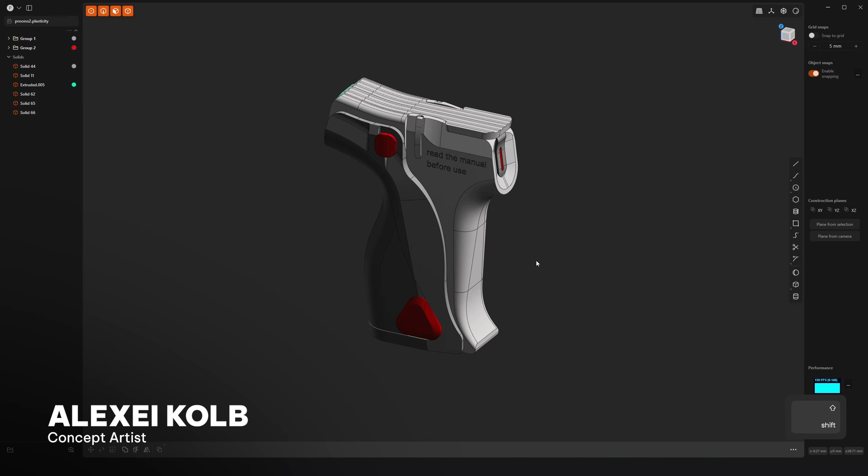In this video, we will be modeling a sci-fi grip. It's going to include a lot of new tools for you to learn. While it is an example I've specifically designed and modeled for the tutorial, the modeling process is close to my real workflow, so you could learn not only the tools on their own, but also the overall strategy for creating a model.

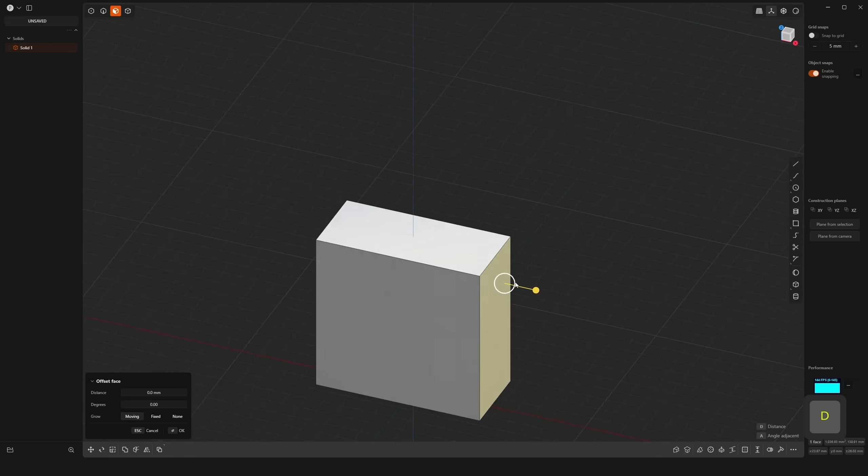The way I would usually start is by scaling the cube to get the right proportions for our model. But let's imagine we need something a bit more precise. Delete the cube. Select the rectangle tool on the right toolbar. Then we're gonna start in the center of our scene. Press C to make it center symmetrical. Before confirming, press Tab to manually enter the dimensions.

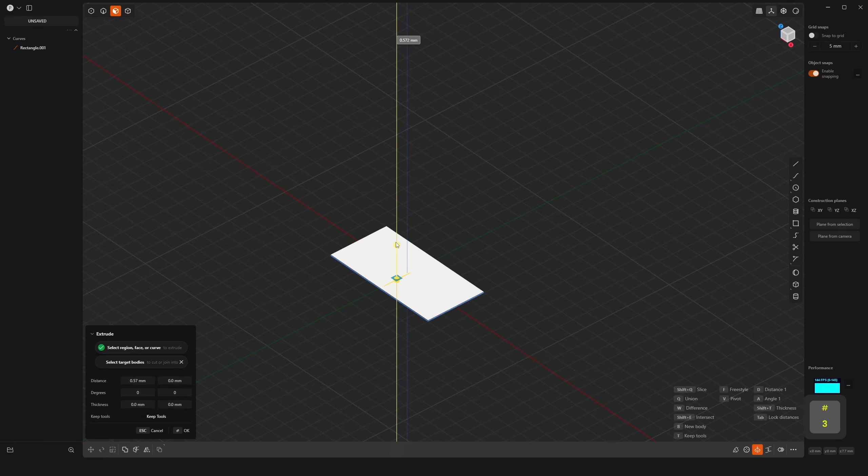Go into the third selection mode for faces. Select the face and then extrude it. You can manually enter the extrusion distance. Let's now select our curve and delete it.

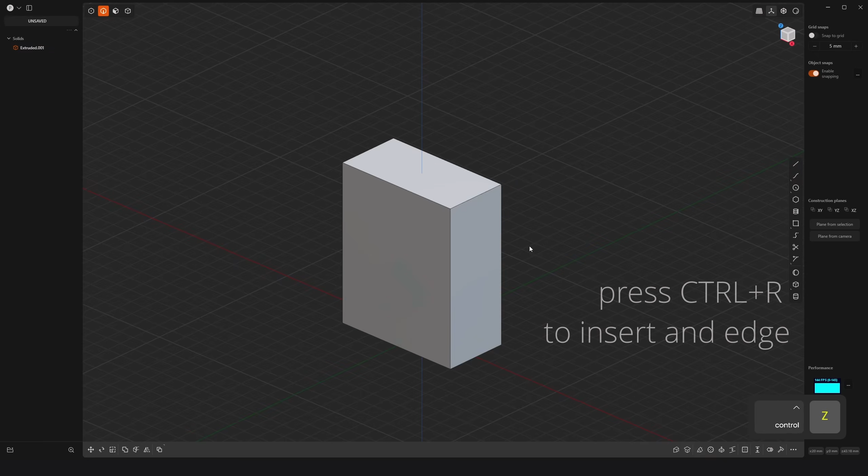Unlike in the previous videos where we used a line to quickly project a cut, right now we are going to use a command called isoparam, or as I call it just by its shortcut, Ctrl-R. It's a very handy tool to create some extra topology. Whenever you start moving or offsetting the faces cut by isoparam, it's gonna create a new geometry based on the initial movement. So if you move it horizontally, it will create a new horizontal face. If moved diagonally, a new diagonal face, or if you rotate it, it's gonna create a new cylindrical face.

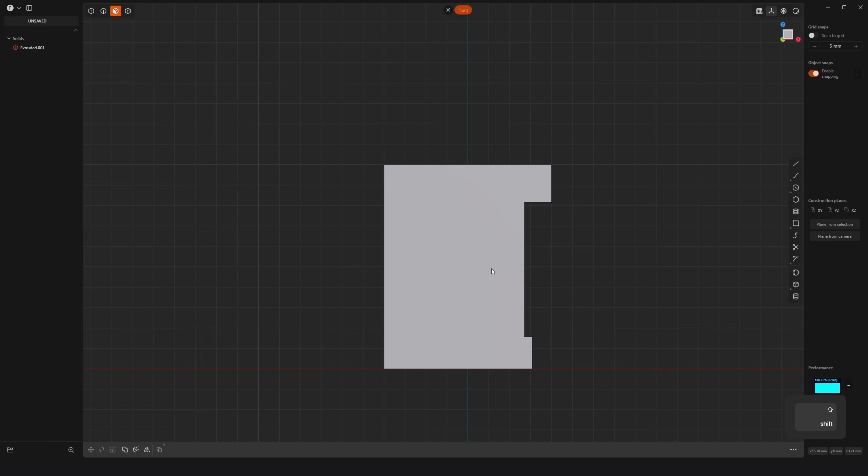Let's use a line tool to create a cutter. After you finish it, press C and select the body. Let's Ctrl-R the top face. If it cuts in the wrong direction, you can press Tab. Press Shift-D to duplicate the face below. Move it up and use Match Face.

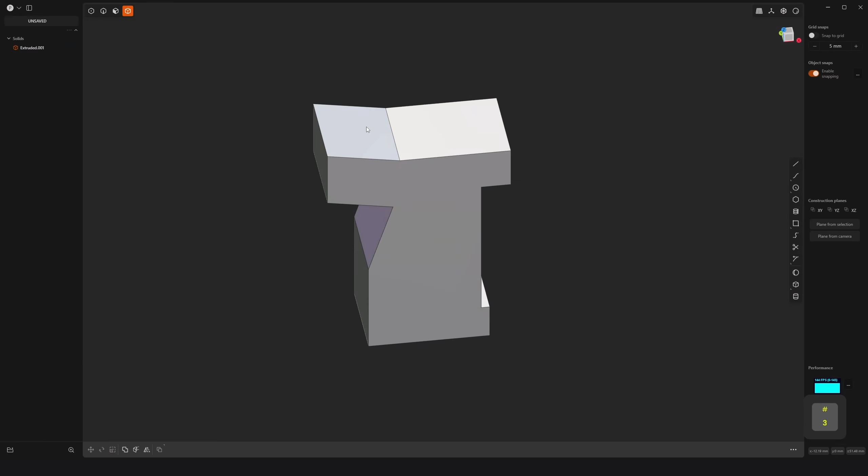While we could have just filleted the back, let's create something a bit more organic. Press Spacebar to set the work plane, and use Spline Curve tool on the right toolbar. As you can see, it goes through points. Press Tab to change it to Control Point. Now adjust the curve so it would look juicy.

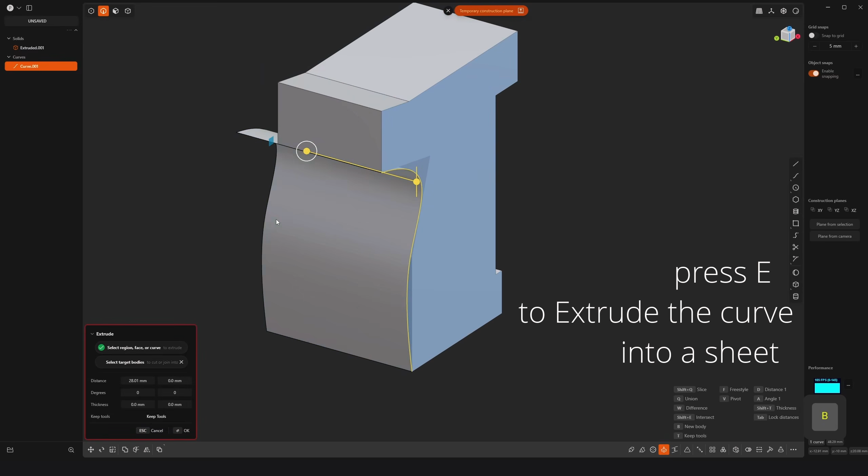One way to make it a part of our body is to extrude the curve sideways, then use Match Face and delete the rest. Or we can just use curve and cut our body by selecting the curve, then pressing C and then selecting the body.

Because we started precisely, we can specify the radius for the fillets to make them touch each other right in the middle. But I don't want that. Let's try G2. Even though it looks alright, let's try something a bit different.

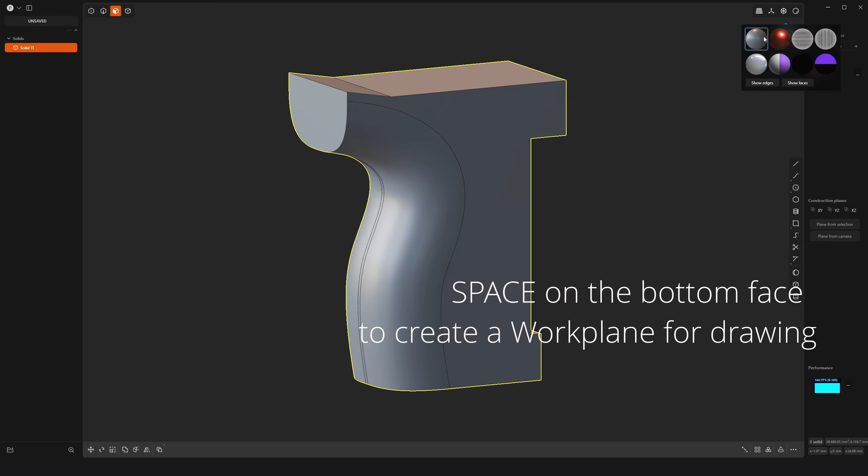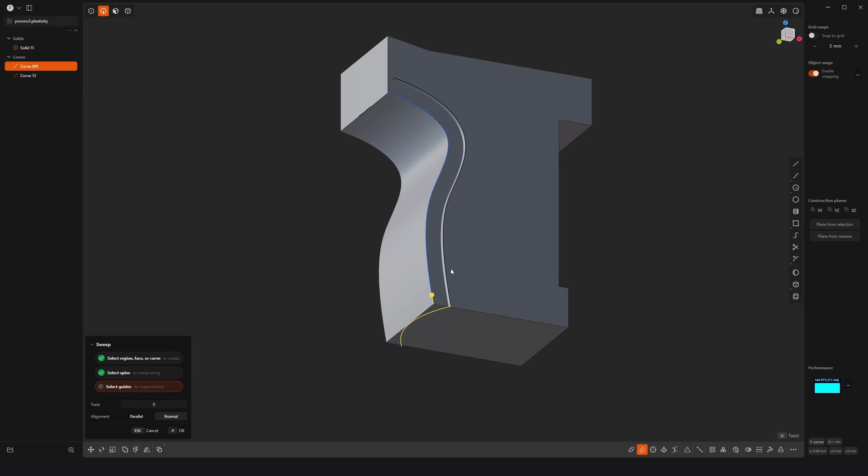Use Spline Curve. You can press Shift to create guidelines. Let's make it bigger to decrease the chance of any problems when using Match Face later. Time to use Sweep. Select the curve first, open F-Search and search for the sweep, or just press Shift-P. Then select the guideline. Right-click to confirm.

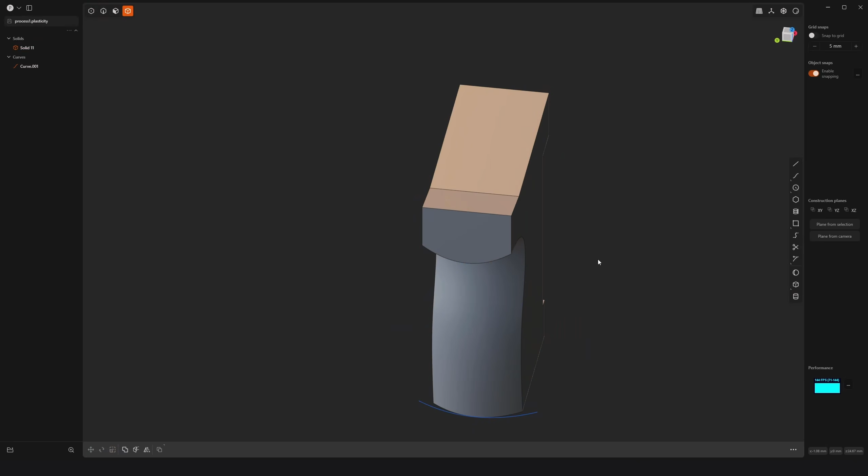Now select the face of our grip, press Match Face and match it to the one we swept. Once we are done, you can delete it. I think it's a bit too thick, no problem, just scale the whole object on one axis. No need for the curve. Delete it.

Time to cut the grip. Alt-align camera with an axis. Shift-A for the line. C and select the body to cut. Let's change the thickness by selecting both sides and offsetting by pressing D.

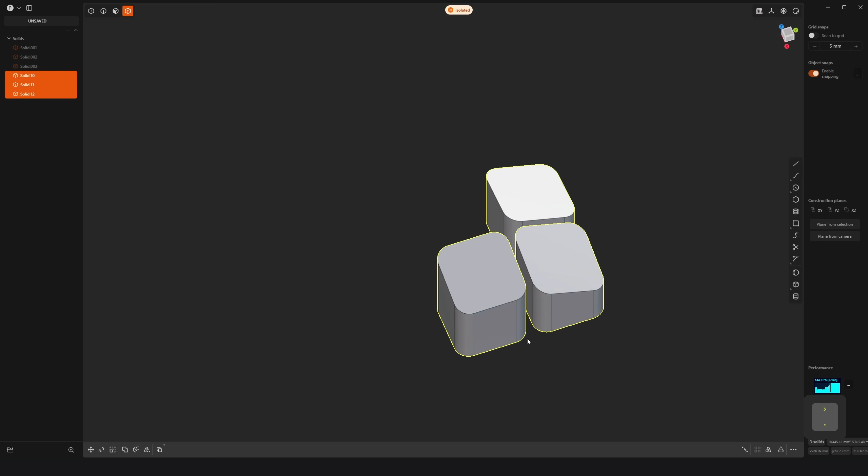Let's quickly learn Isolate. You have 6 objects, you need just 3. Select those and press period key to isolate. Now that we have only 3, what if we need just 1? Select it, press isolate. Let's go back to 3. Deselect everything and press isolate.

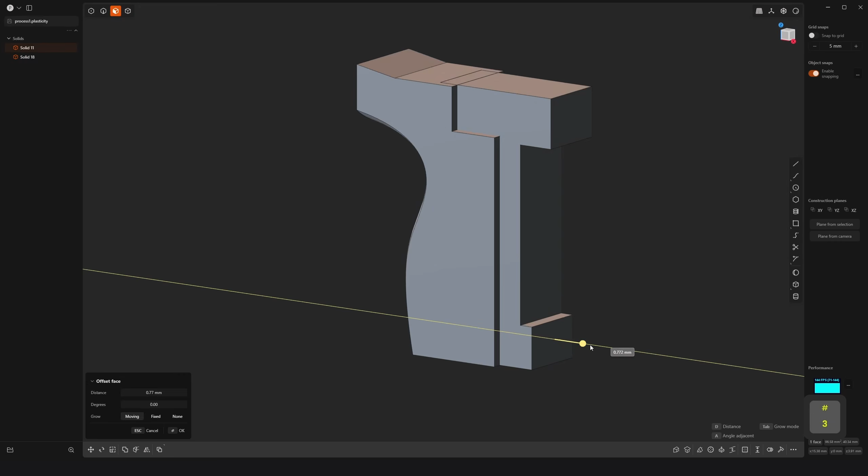Need to hide one object? Select it and press H. Unhide everything? Alt H. Back to 6. Again, have nothing selected and press period key. Yeah, it's kinda like layers. Want to remap it? Search for it in the F-Search and bind a custom shortcut.

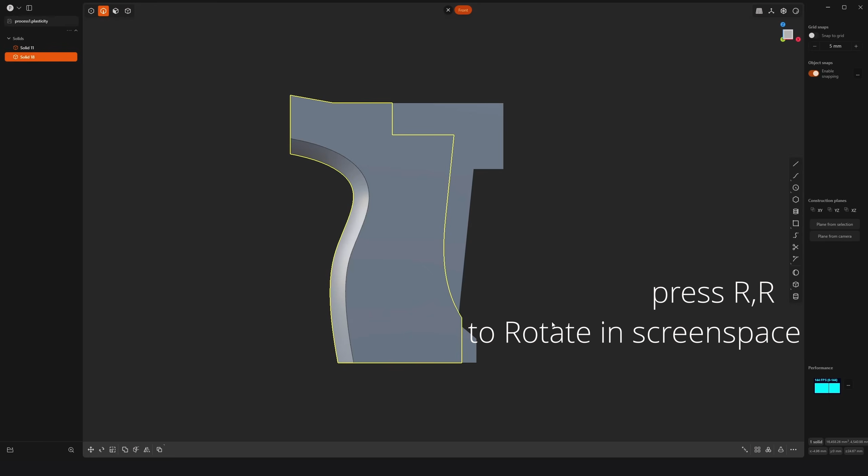Yeah, time to do it again. Don't like it. Let's delete it and redo it. Shift-D the face, move it and use Match Face. Looks decent.

Isolate, Ctrl-R, Offset, Ctrl-R, Match Face, nothing new. Fillet both sides. Adjust it.

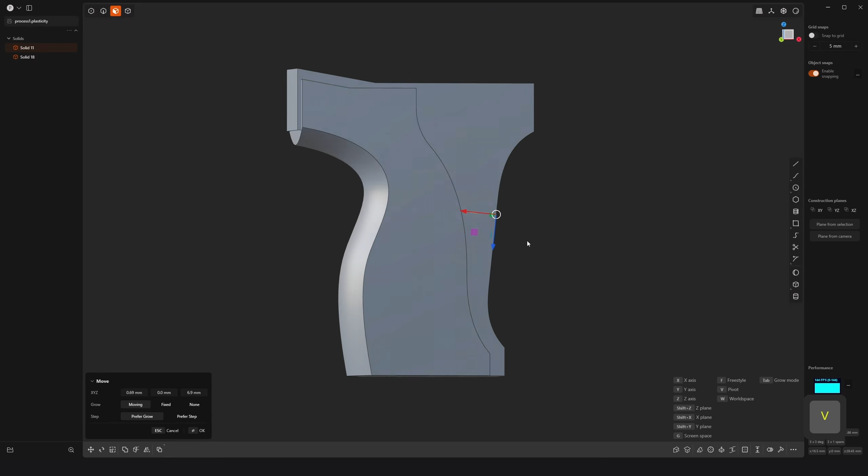Let's fillet the edges here. Not a big fan of how it looks. The bottom needs to be sharper. After you start the fillet, press V to use variable fillet. You can adjust ends right away or add another point for the custom radius. I don't need it, so I'll use the two ends, nothing more.

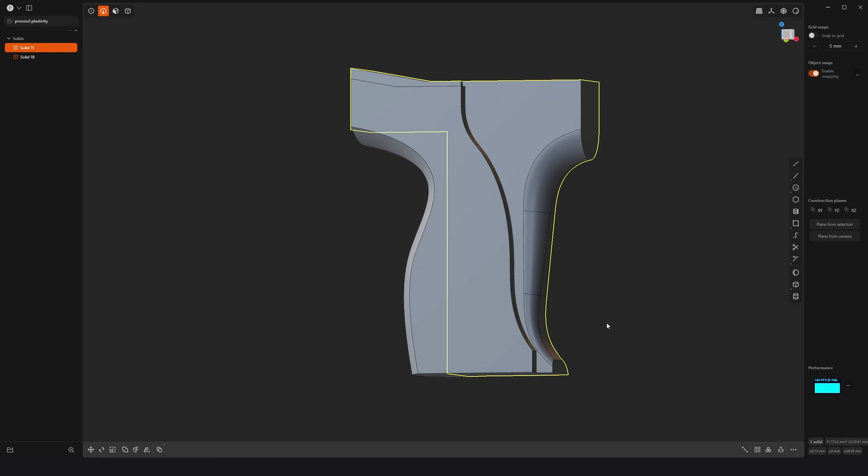Let's mirror. Q to merge. I want to add a plate on top. Select top face, extrude, B for new body. Let's cut the unneeded. Let's cut the right part into two and boolean the left one with the top plate. Looking good. Let's now add some details.

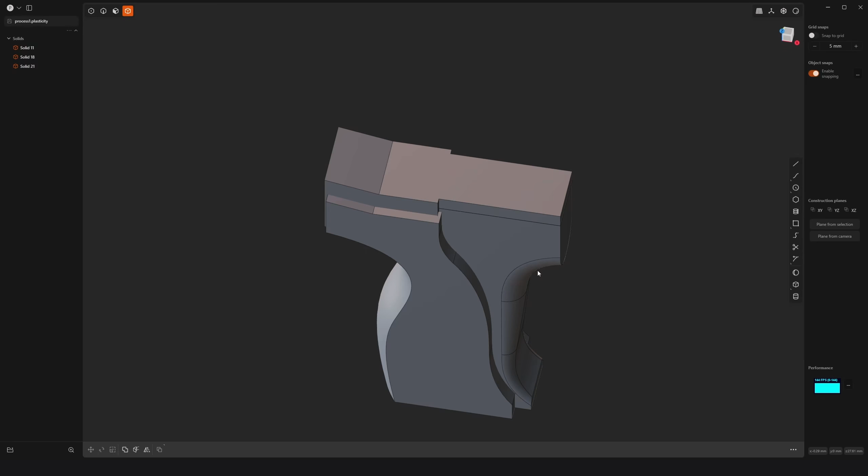I'll Ctrl R the side of the plate, move it inwards, offset the top of the lever up, Ctrl snap it to the top. Now let's boolean the top plate out of the lever. Select lever, select top plate, press Q, then press T to keep tools.

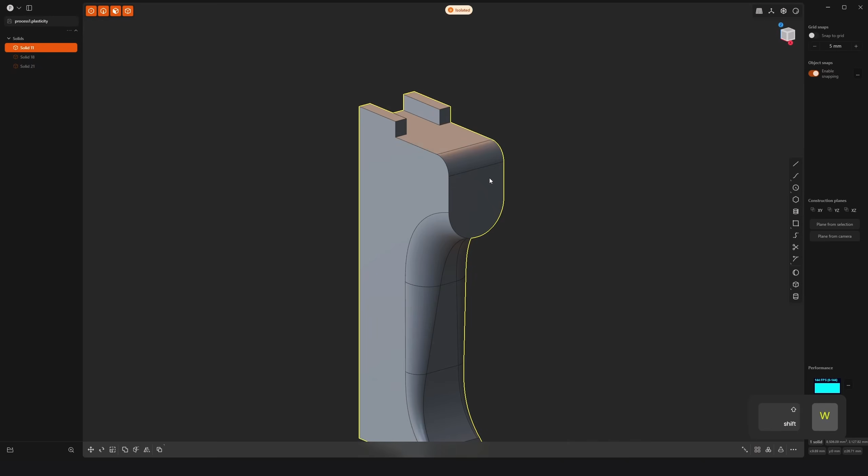Play with it by offsetting and moving faces. Great, let's mirror both. Fillet the sides, fillet the top. Now select the front face and press O for offsetting the edge.

Let's push it in and then push the top face up until it disappears. Now extrude a new body and offset one more, or you could just do a new rectangle. Offsetting sometimes creates problematic edges when you extrude it, so be aware. It's hard to look at without any color difference.

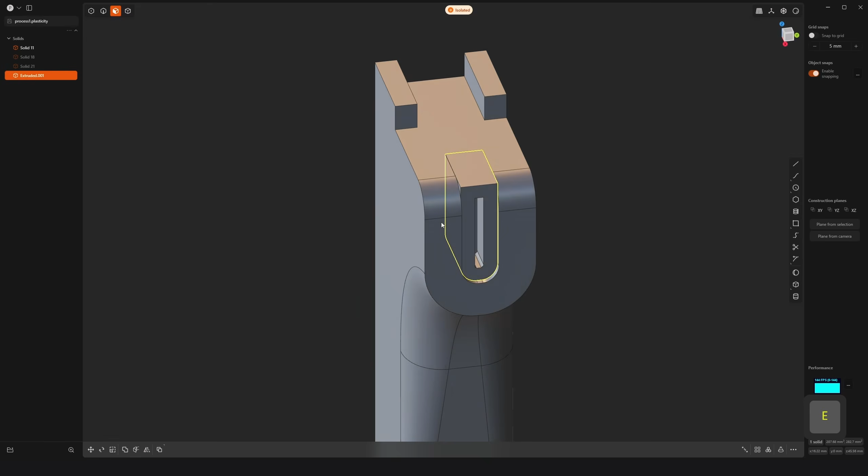Turn on one of the two bottom left matcaps. Let's set a darker color for the grip body. You can also drag and drop it to the objects in the outliner.

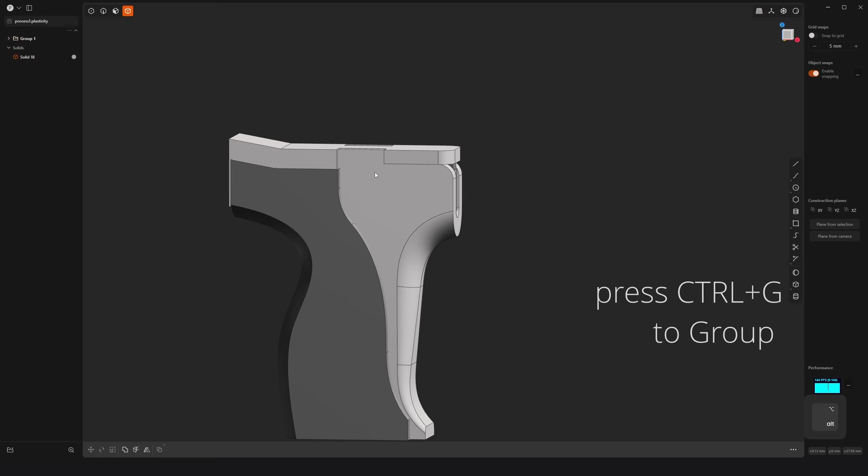Quickly about groups. Let's group everything that's not the main grip by selecting it and pressing Ctrl G. Now, if only the object selection is active, we can select the group by holding Alt and clicking on any object from the group. Also, let's make this thing red.

Okay, time to model a bit more. Let's fillet the back side of the grip. I think G1 looks a bit better.

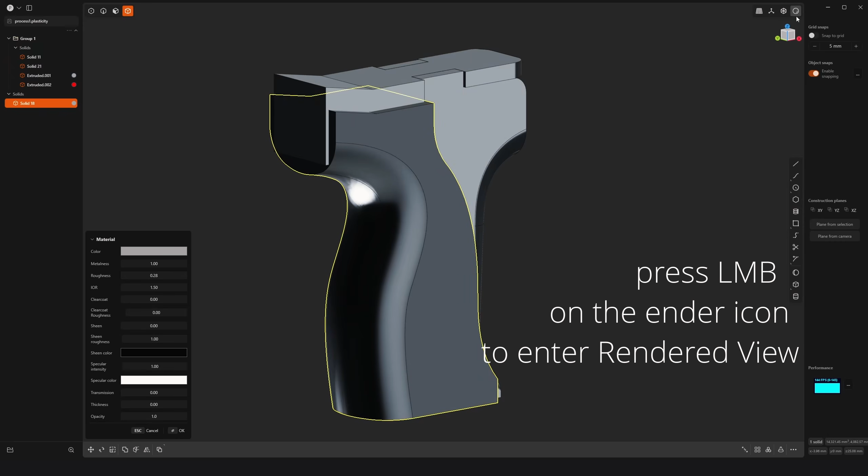Also, a thing to note is everything else other than a color is only visible if you left-click the render icon to activate the render mode. Alt snap the cam to the top, Shift A for a line to cut the thing.

Let's adjust the face now to make it look more dynamic. Looks good, but we can go further. Duplicate the edge. Ctrl R on the cut closer to the edge.

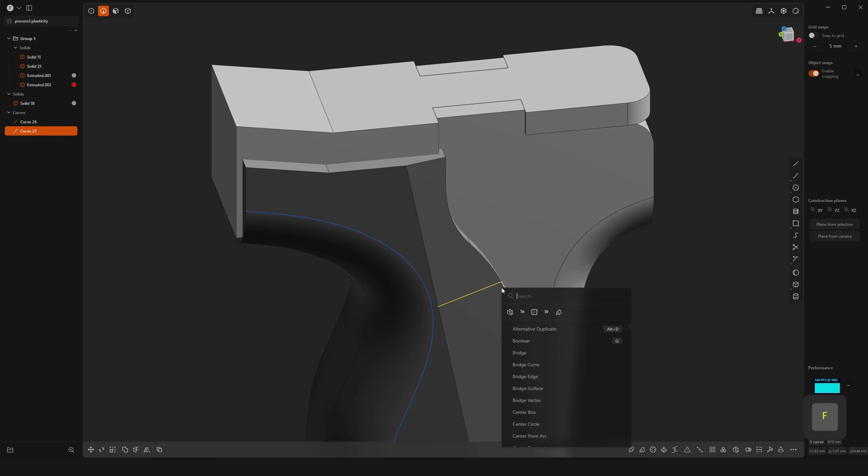Duplicate it as well. Use split curve to add a point to the curved one. Now Alt J to make it split into pieces. Let's now sweep the edge using another as a guide.

Match face the top part of our cut to the newly created face. Let's now play with it again, offsetting and moving faces. Ctrl R on our curved cut.

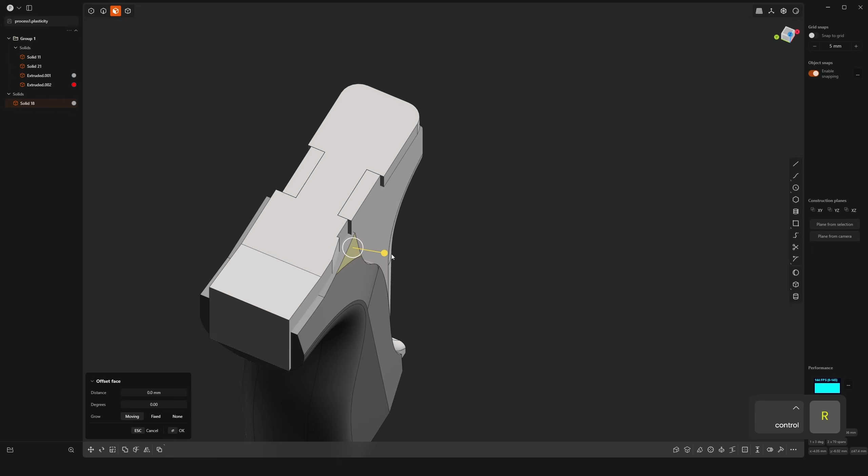Offset it. Duplicate the face on the lever. Move it to use as a match face reference. Match it. It's a good idea to use delete redundant topology every now and again, so it would clean the

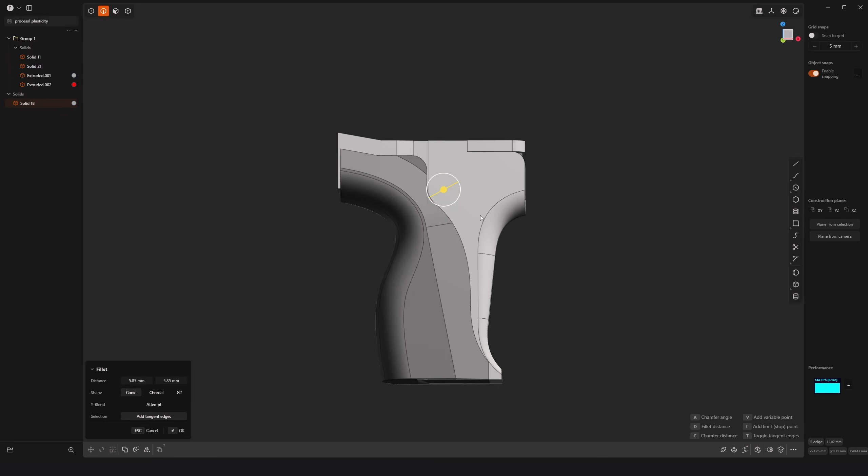unneeded edges. Let's try to fillet it. Can't go very far with this geometry, so let's adjust it slightly so we could do a wider fillet. Little problem with offsetting here.

Let's do another Ctrl R and match face right after. But I think now it looks better with a smaller fillet. It's a good idea to hide edges from time to time to get a better idea of how it might

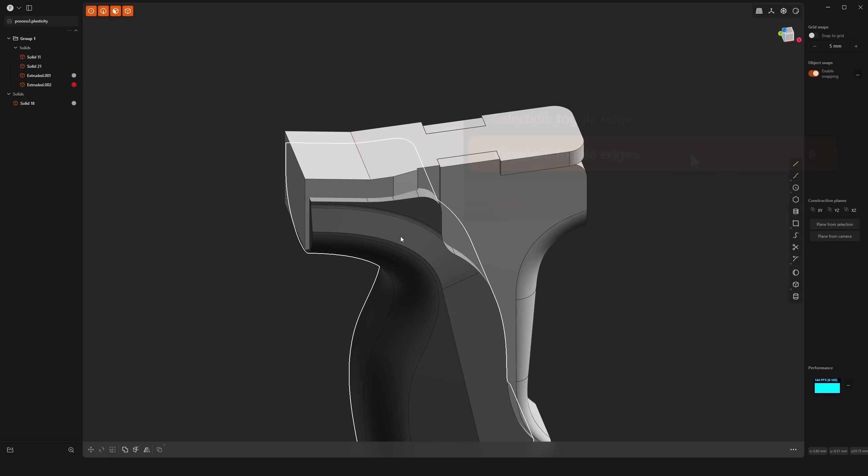look in the end. So I would suggest you to assign a shortcut to it in the search menu. Let's do a safety switch. Extrude anything anywhere. Success. I want same offset from the edges, so I match both first and then offset them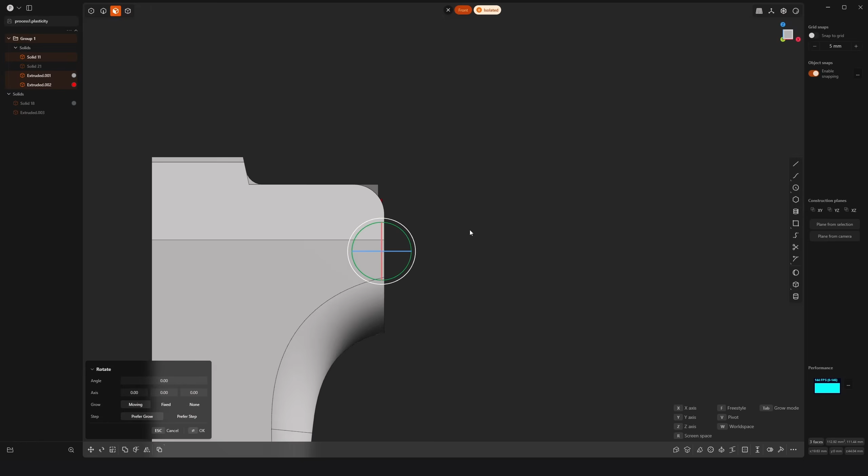together. Experimenting with fillet radius. Let's chamfer the top side of the lever. Rotate it a bit. More fillets. Rotate the front face. In case the gizmo is not straight, press W to change the gizmo orientation to the

world. Mirroring the lever again. Pushing the plate a bit lower. Mirroring the grip. Adjusting the plate's end.

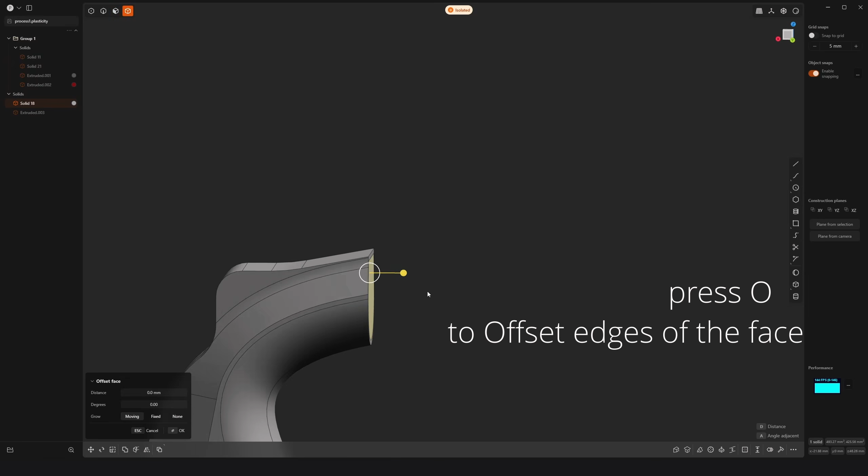Time to work on the back screen. Again, isolate, select the face, O to offset. Delete the top parts that don't go straight up. Now is the cool trick to make it match the top plate's width.

Select all the continuous faces by holding Alt. If the wrong face will get the gizmo, deselect the needed one with Ctrl and select it again with Shift. Now use the gizmo and hold Ctrl to snap it to the side of the top plate.

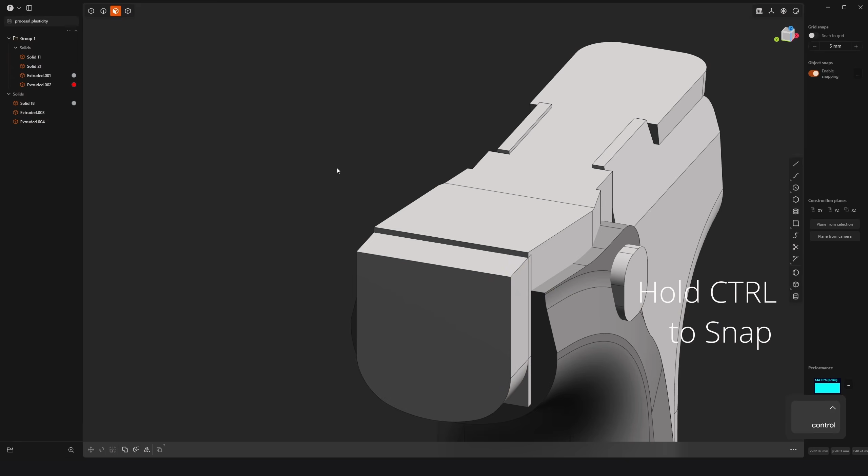QQ to boolean them together. Move the unneeded part to the side. Rotate grip's backside and match the screen plane to it. A fillet here and a small fillet on top.

Let's add a bit more protection to the safety switch. Extrude the face sideways as a new body. Offset it up and down, match face to the side of the grip.

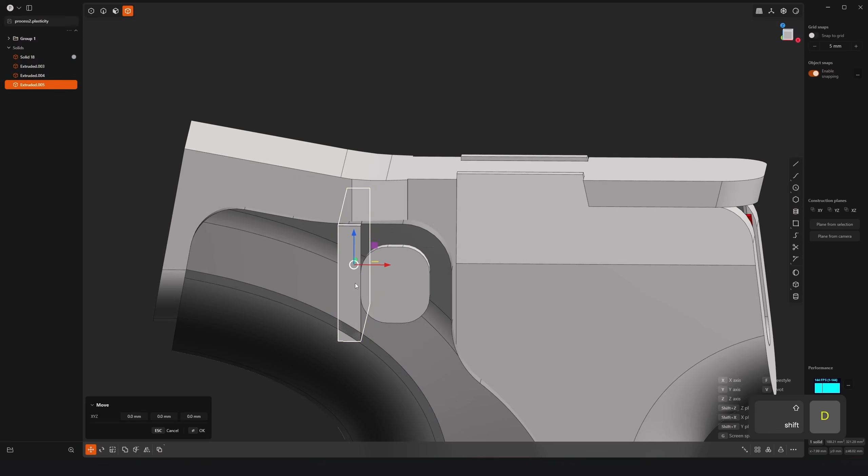Duplicate and rotate it 90 degrees. Move down and snap it to the lower edge. Boolean them together. Do a fillet and match it.

Boolean it together with the grip with QQ. Delete the unneeded. Let's fix the top with Ctrl R and match face. Let's do a triangle button.

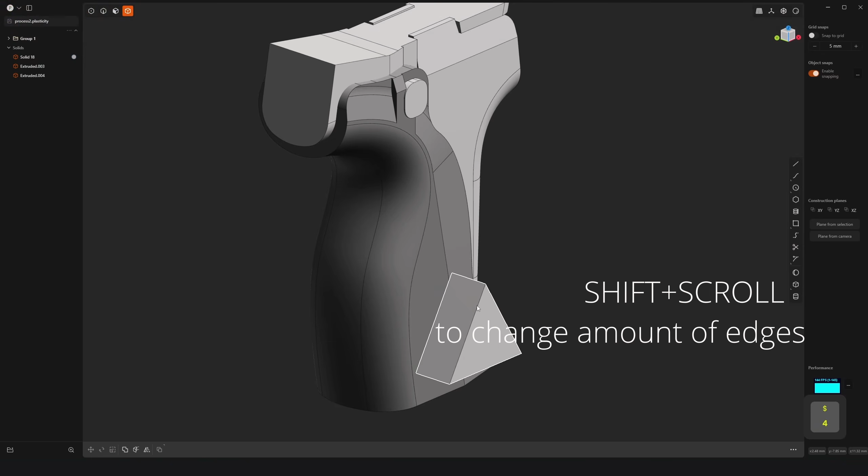Select the grip side, spacebar, use polygon tool, shift scroll to make it a triangle, extrude it out, move and scale it into the place.

Select the edges around it by holding Ctrl Alt, fillet the edges, boolean the button out of the grip. Select the grip, select the body, Q and T for keeping the button.

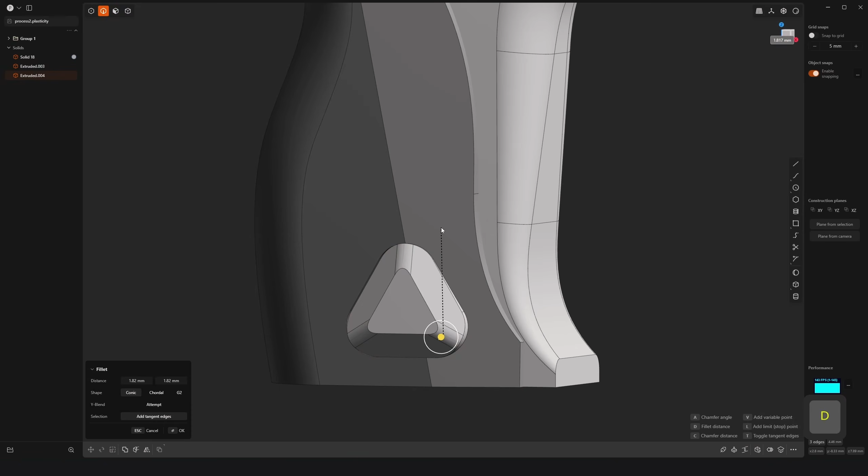Select the edge of the button, C for chamfer distance, A to adjust the angle. Delete the chamfers on the angles. Now fillet those edges. Let's cut the grip in two parts.

It's like a battery compartment. Select its side, spacebar. Let's now draw the cutter using Shift-A line tool. Adjust it by selecting and moving the points.

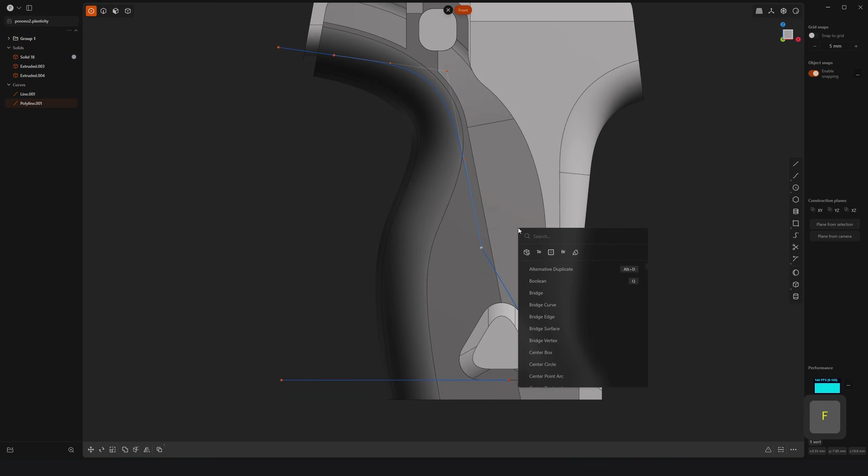To turn a sharp angle point into a spline, double-click on the point or use Convert Vertex in the search. Adjust it by deleting, adding or moving. You can add a point with the Split Curve tool on the right toolbar.

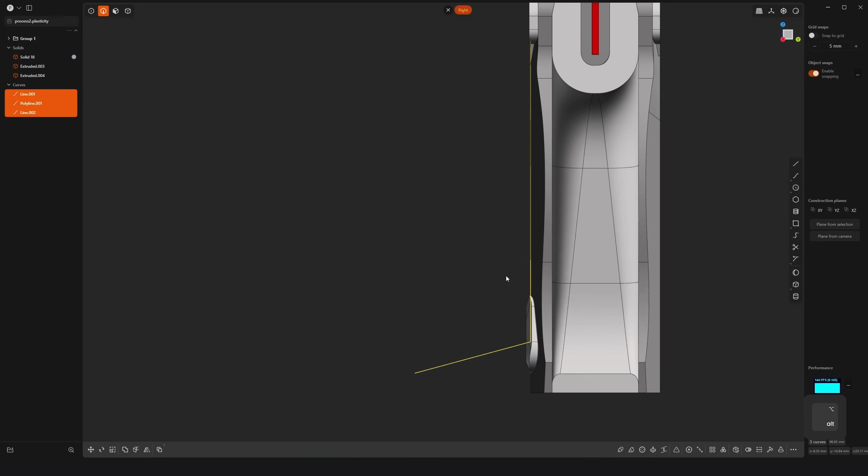Let's connect the lines together. It's not required, but I like to have my lines flat, so it would be more obvious for the software what way to cut with it. So I just scale all of them on one axis to flatten. Now select them all and press J to join them together. Now we can use them as a cutter.

Let's scale the part that we cut on one axis to make it a bit slimmer, to make the detail clearly separate. Adjusting the button. Let's use the red color for it.

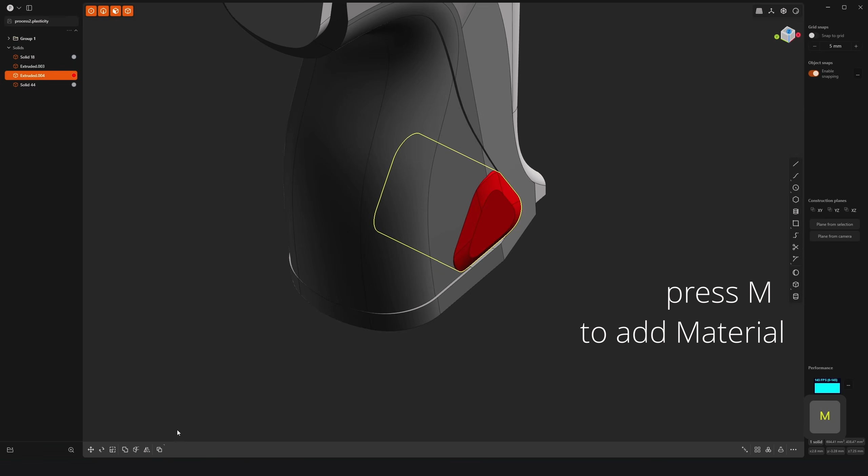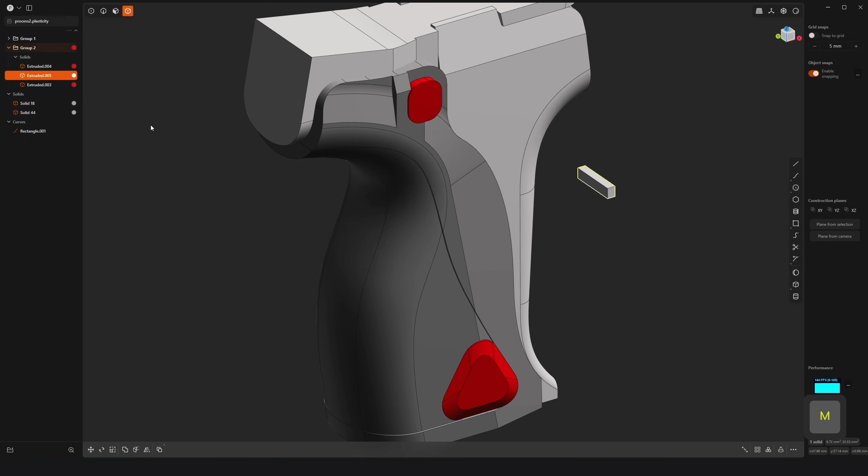Let's drag and drop the color in the outliner for the safety switch. Or what we could do is create a folder for them, Ctrl G, drag and drop the color onto the folder. Now every object in the folder that doesn't have a color assigned to it will have the material of the folder. For example, this object.

But if we assign the material manually, it will ignore the folder's material. Alt-M to delete the material. Let's select those faces and move them in line with the grip detail. Ctrl-Alt-click to select edges around the top plate.

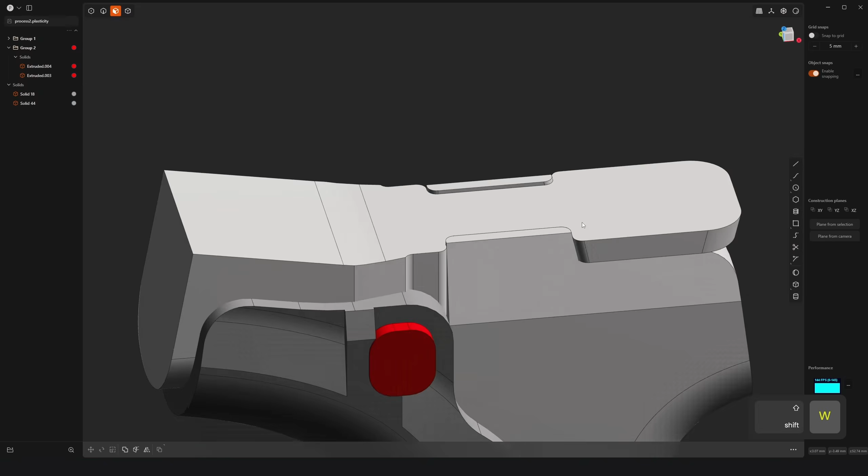Let's now fillet them. Instead of filleting the lever detail to match it, we can just boolean the top plate out of it, and then move the leftovers up until they disappear.

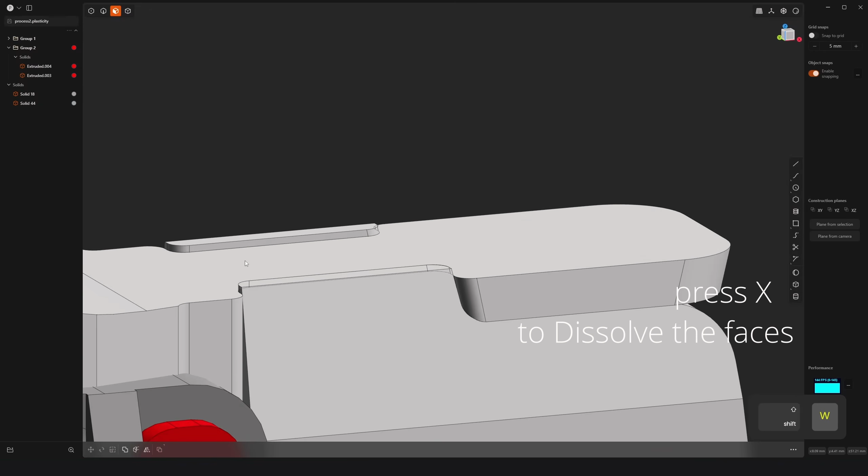Let's now fillet the lever in here. Since we don't really need the fillet all the way there, we can delete whatever we can so it wouldn't bother us in case we would want to change something there. And the same way, instead of filleting the top plate to match it, we just boolean the lever out of the plate and delete the rest.

Let's make the top of the lever a bit more interesting. Ctrl R, rotate the faces, rotate, move them together. Now let's do a big fillet.

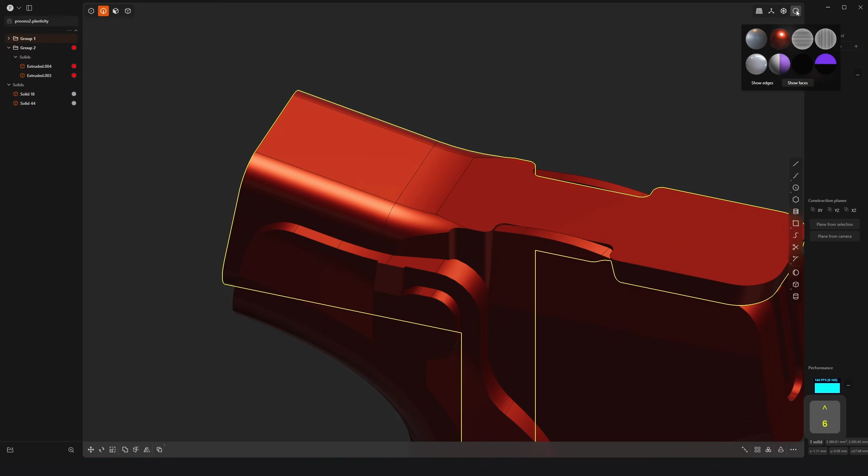Let's try to fillet the side of the slide. I think it just doesn't quite work with the geometry that we have. Let's just delete all of it. This looks cleaner, but I don't like how the fillet on top is way too sharp. Oh, let's also mirror the thing.

Let's delete the fillet and make a new one, but this time a G2 and much bigger. Now it feels way more organic and pleasing to the eye.

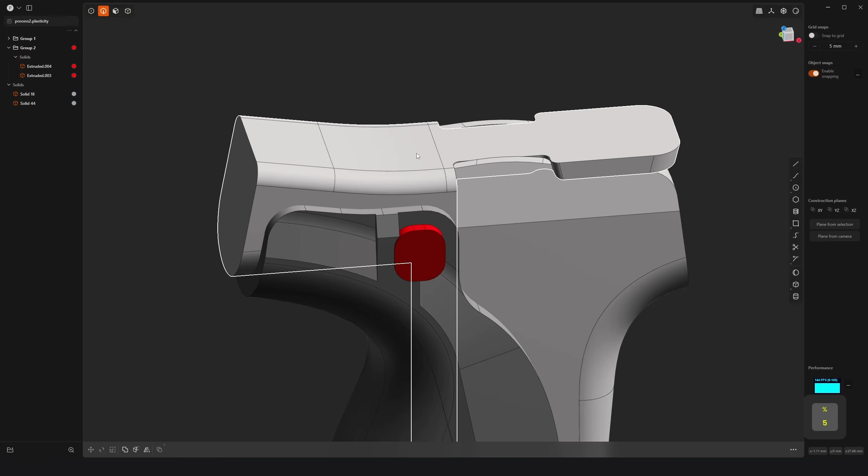Time to do some serrations on top. Let's draw a line from the top view. While it's selected, press Shift-I and select the body to imprint it on top. Now we can use it as a base for a pipe to cut out.

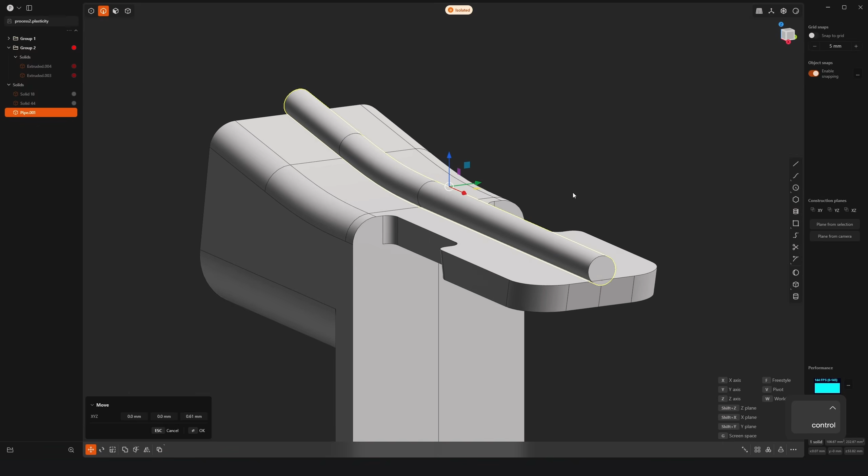But I don't want it to be in the center and very deep relative to its width. This would create too much contrast. Just moving it up wouldn't create a proper offset. So I'm gonna go back, duplicate the edge to make it a sketch line. Now, because it's flat, we can offset it. Yeah, this is what I want.

Now, while having it selected, let's use a rectangular array and snap it to the side axis. Now let's adjust the distance and the number of instances.

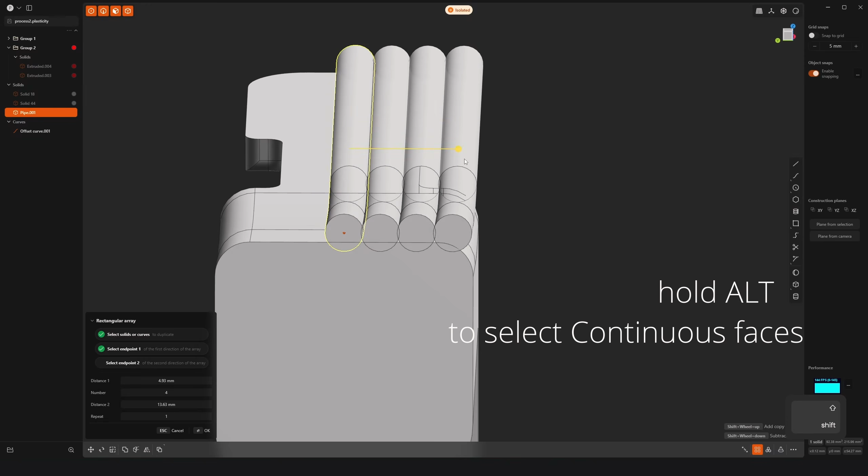Looks good, but I want the boolean pipes to be even thinner. So I alt-click on the faces to select all of the curved surfaces and offset it to make them thinner. Do a boolean operation. Select the body first, then select all the pipes and press Q. Great. Now let's check how it looks with the different matcaps.

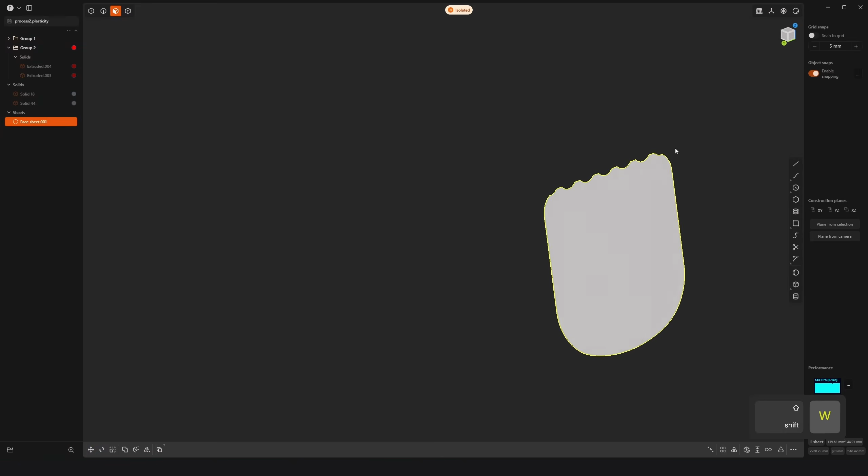And in render mode. Time to do the screen. For it, I duplicate the back face and delete all the edges that created the grooves. Select that face now. Press O to offset the edge. This looks about right. Let's extrude it in and refillet it.

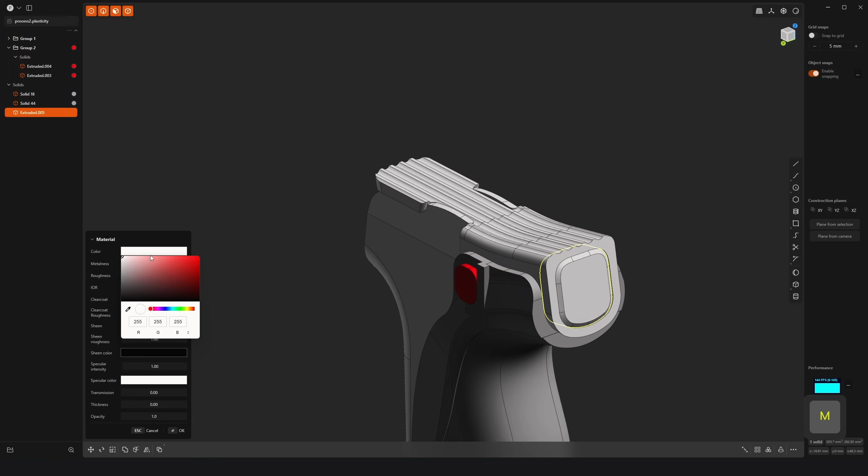I think since the bottom is a nice curve, G2 fillets on top would look better. So I refillet it again. Chamfer, adjust the angle. Let's assign it green color. Let's fillet those edges to make it look more like plastic.

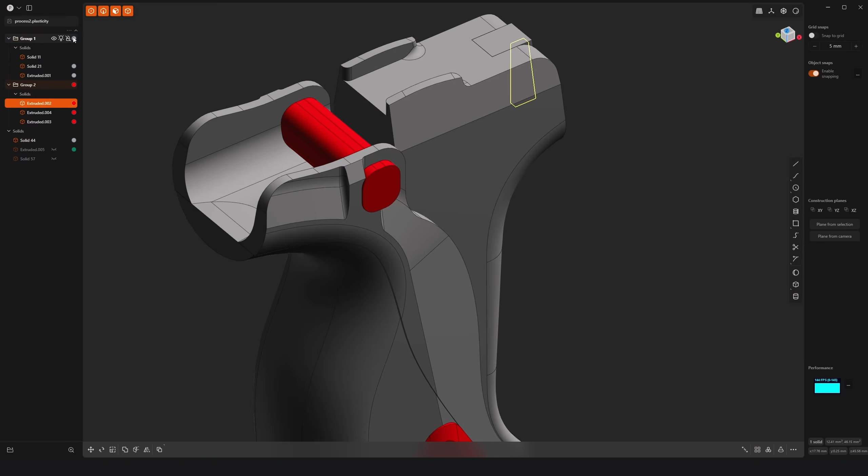Here I see the grip and the screen bodies intersect, so I'm gonna do a boolean, cutting the top out of the grip. So you can see its material has changed. It happened because the boolean split the grip into two bodies. So one got the original material and another one became a new object.

Let's quickly fix that. Let's chamfer the front. Because I want the chamfer to go a certain way, I select all the edges that I need and then press T to only chamfer the needed.

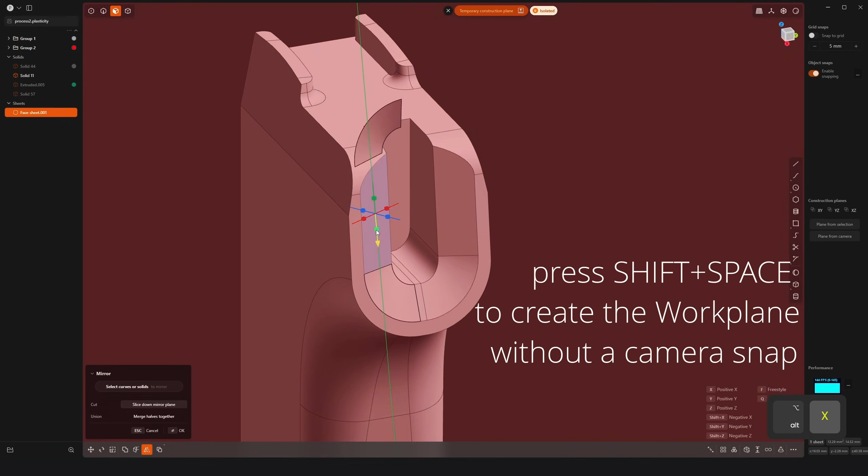Nice, but I want the shape to be more interesting. Let's duplicate the chamfer on the angle. Now select the face on top and press Shift Space to make it our custom work plane and set the coordinates. Oops, it was a bit tilted, so let's use just the edge instead.

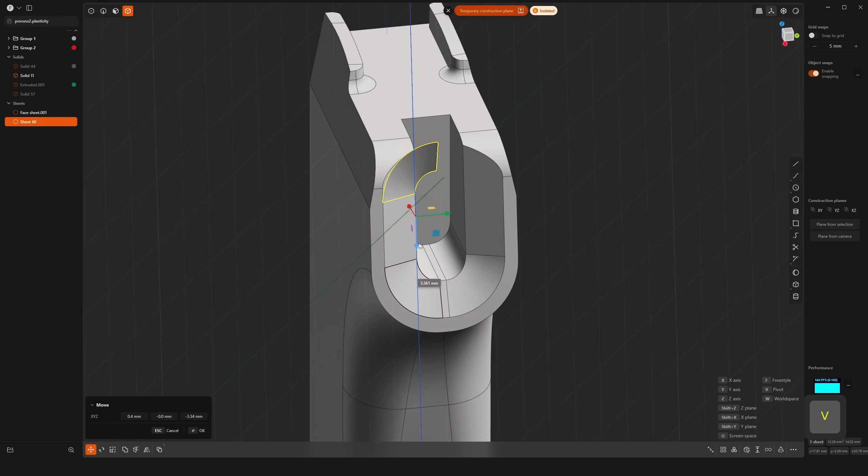Select the edge and press Shift Space. Select the face we duplicated, press Alt X to mirror, and now it will use our custom coordinates. After you are done, use the Move tool setting the pivot on the edge and move it down. Now Ctrl R the face below, and use Match Face to match the top part to the mirrored face.

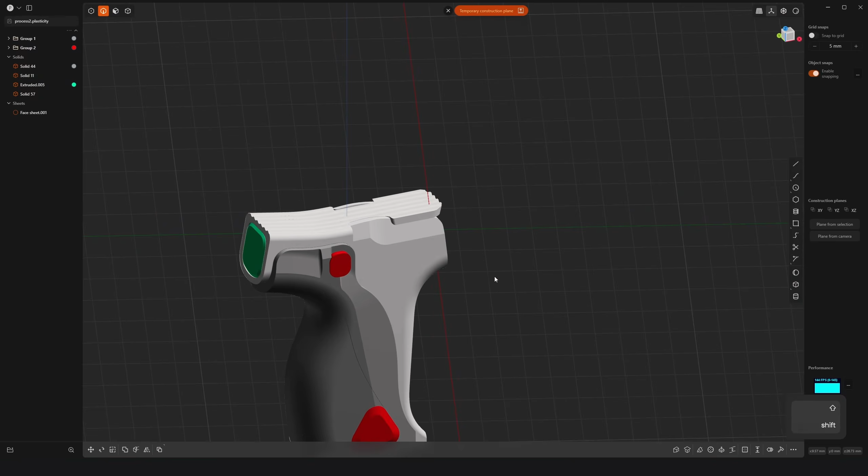Time to add more details. Ctrl R on our chamfer on the lever. Now offset it out and fillet the edge in the corner. Let's maybe adjust the previous one a bit more. While it is a very normal chamfered face, and it goes on top of a very normal fillet, the intersection creates a more intricate shape. So keep that in mind when adjusting it.

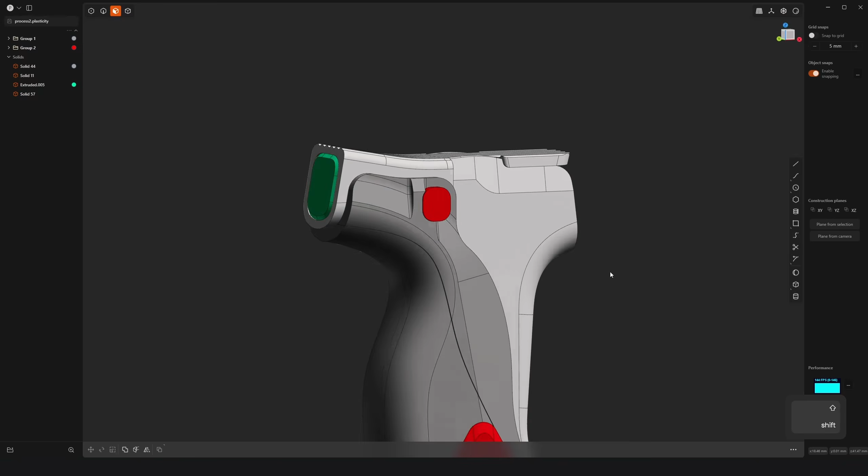Some more adjustments to the laser thing. Again, Ctrl R, offset, fillet, same as always. Fillet in the edges. More adjustments to the screen. Let's cut the face on top and fillet it, to have a more interesting shape transition. Fillet in the back to increase the visual separation of the details.

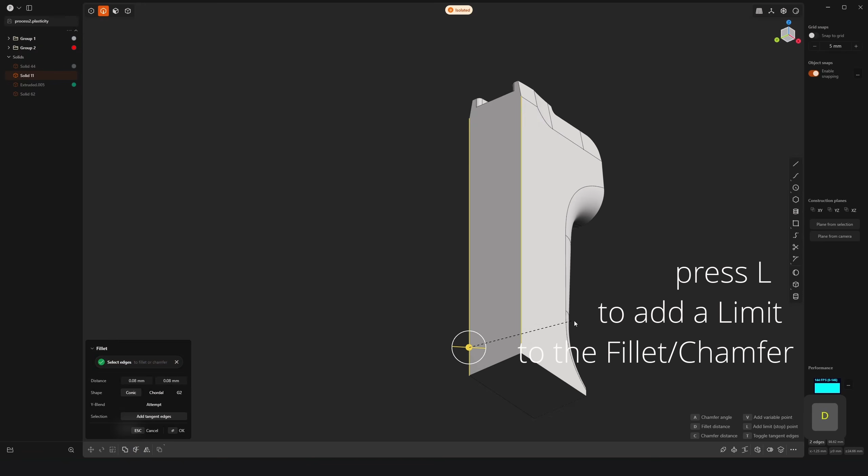More fillets. Let's learn how to do a fillet with a limit. Because as you can see, we need fillets only on the bottom. Start the fillet, press L and click on the edge where you want to add a limit. You can click on the blue-purple point to invert it. The other detail doesn't have that problem, so we are going to just start filleting and match the fillet.

Chamfer the front part of the safety switch. Press T to only chamfer selected. Rotate and fillet. Don't forget to mirror both the safety and the trigger button.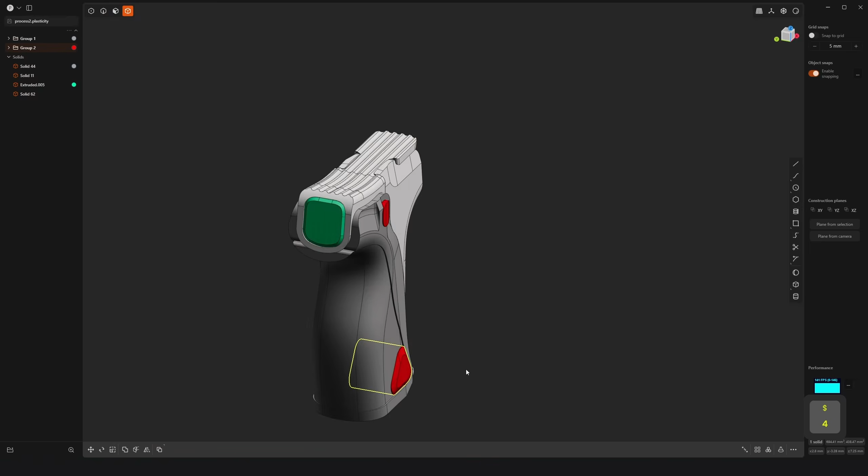Let's add more details. Select the lever face. Space to create a work plane. Draw a rectangle. Extrude it in. Offset the face out and up. Adjust it until it looks good. Fillet it. Select the object.

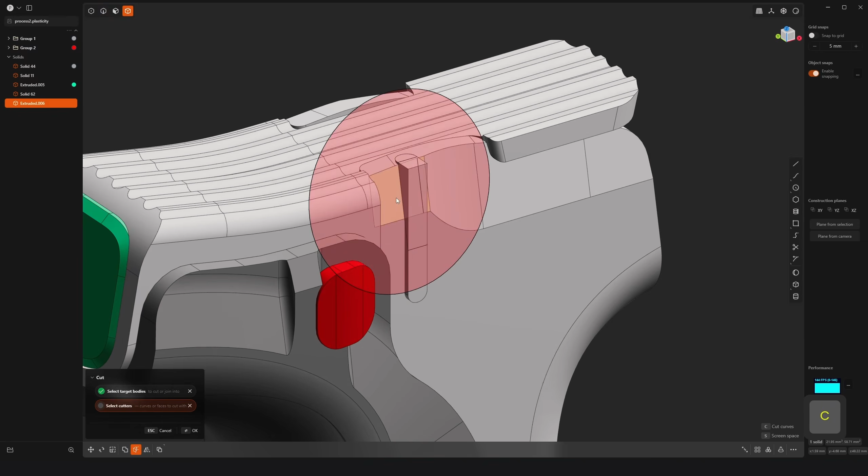Press C for cut. Then select the face on the lever to use it as a cutter. Boolean the detail out of the lever. Offset the face lower. And let's do a big fillet. Maybe one more fillet? Nah, it only makes it worse. This one too. Mirror both.

Now because we can't merge two things on the side after the mirror, it won't merge anything. So mirror both without merging and merge the lever manually with QQ.

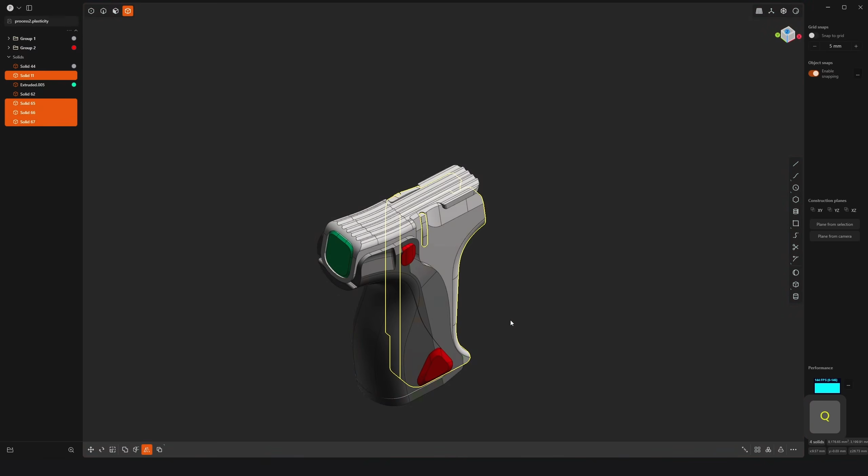Maybe we should add some text. Spacebar on the plane you want to put the text on. F, search for text. Scale it so you could see it all. Write what you want. After you're done, you will get the curves that you can freely scale and move. Put them in the appropriate spot.

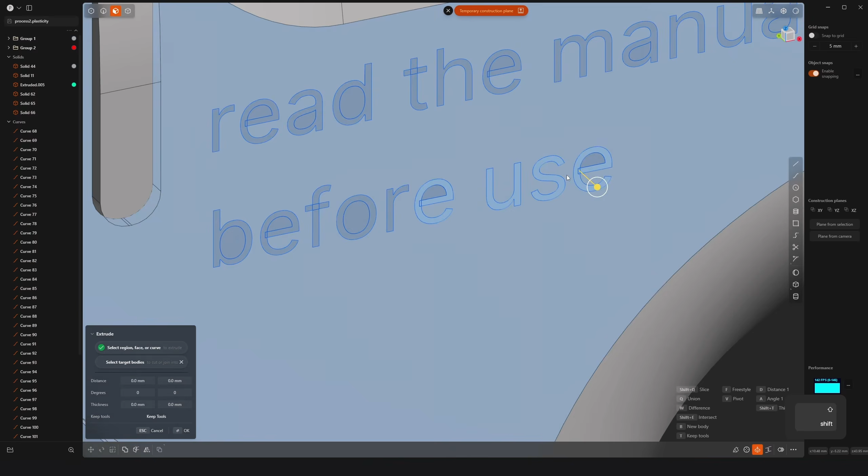Now select every face there. The best way would be to just select everything and then deselect the insides. Extrude it out so it would be easier to select later. Delete all the curves. Now move the text a bit into the lever. Boolean it out of the lever.

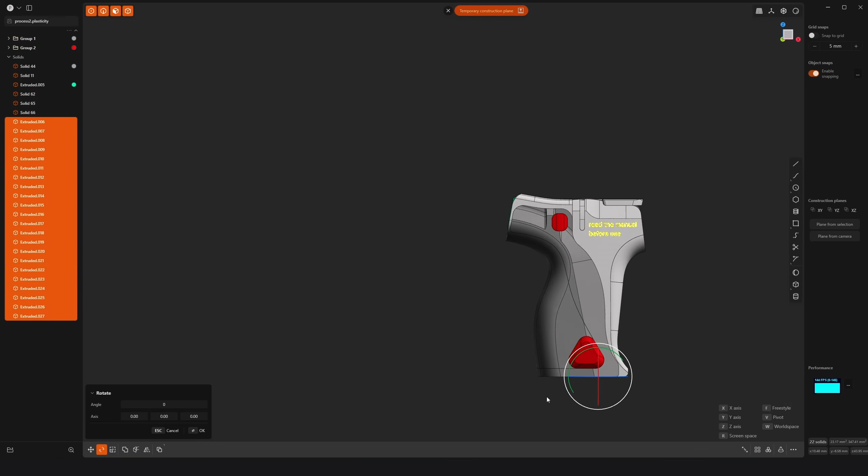Don't forget to press T to keep the text. Let's now rotate it using something in the middle of our object as a pivot. Move it again. Because we rotated it around the center, it has the same depth.

Now let's do something extra, something a bit more advanced. It should be a great way to get your first step into surfacing. You see how the fillet creates a very weird shape on the side of the grip? Let's fix that. Spacebar on the side face. Let's draw the edge like the fillet was never there.

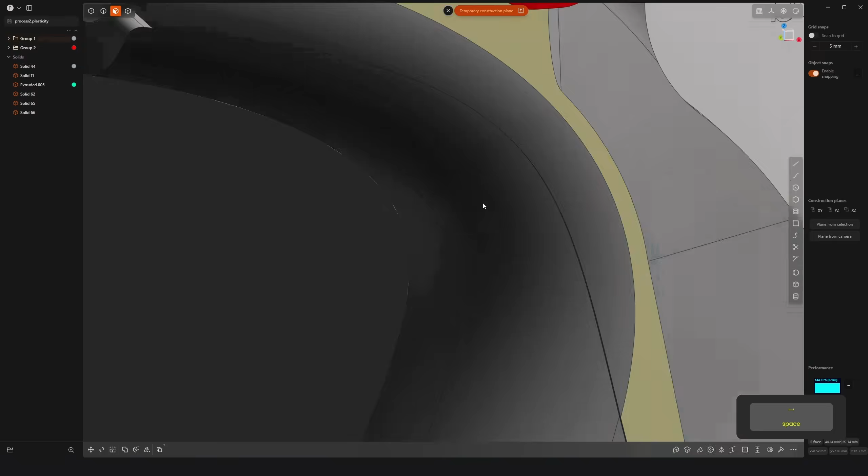Duplicate the edge on the left. Let's eyeball where they would intersect. Draw a circle touching the left one. Now use Trim on the right toolbar to delete everything inside the circle and the circle itself.

Activate point selection. Select 2 points and press L to loft them. Press Tab until it's G1 for both. We want it simple here. Adjust tension 1 for both. Make the points evenly spaced.

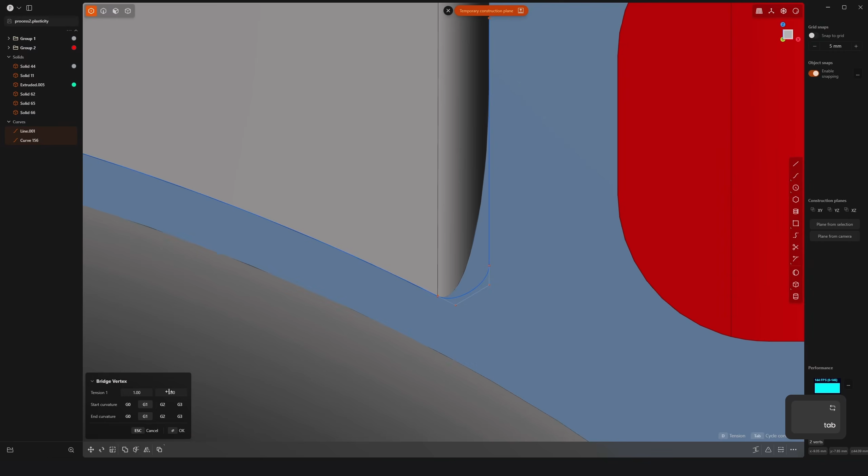Let's select our new curves and imprint them onto the body with Shift-I. Shift space to get out of the work plane. Let's draw one more line where the vertical one ends. Project it onto the body as well.

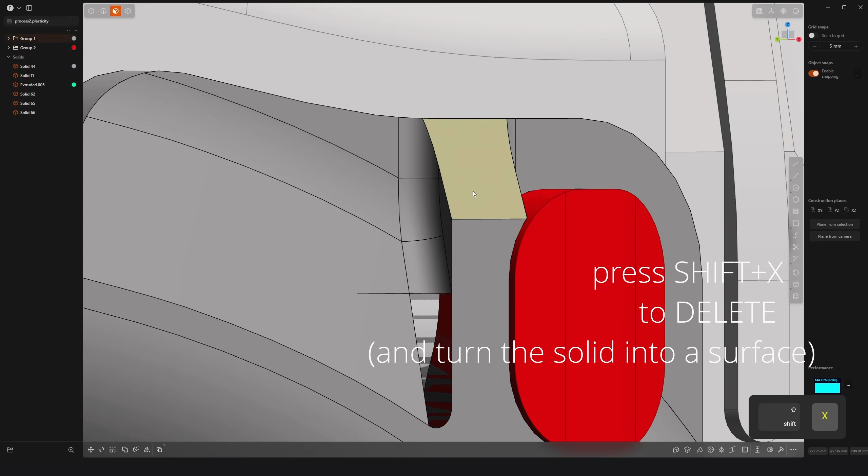Now Shift-X delete the face. While we used to call normal X delete, I think it's actually closer to something like dissolve, where Shift-X just evaporates the face instantly, transforming our object from a solid to a sheet.

Finally, Alt-click on the edge of our hole to select it all. Use the patch from the bottom panel. If we hide our edges, you can see that it creates hard edges where we don't want them. So what we need to do is to specify the surface continuity. Let's go G1 on top and G1 on the left. I think it looks much better now.

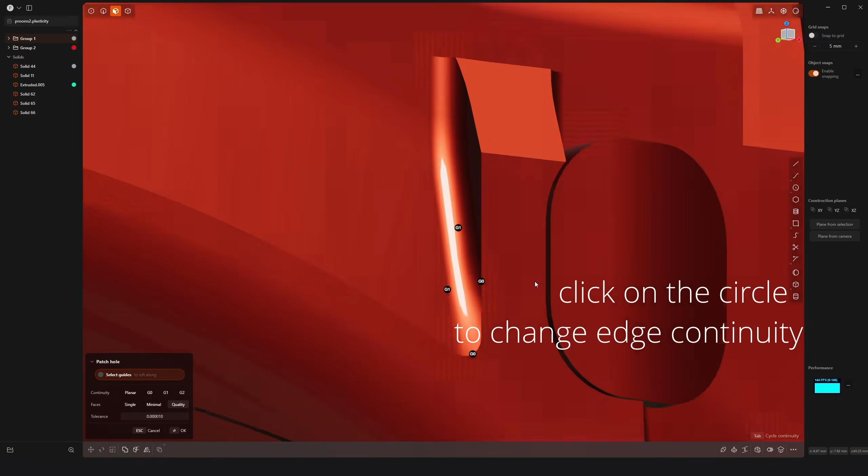Sometimes it might look a bit weird if you have your performance settings on normal. Sometimes it looks weird even on extra detail turned on. But if there is nothing too crazy going on, it's just probably the internal polygon representation for the viewport render. And in reality, your surface is fine.

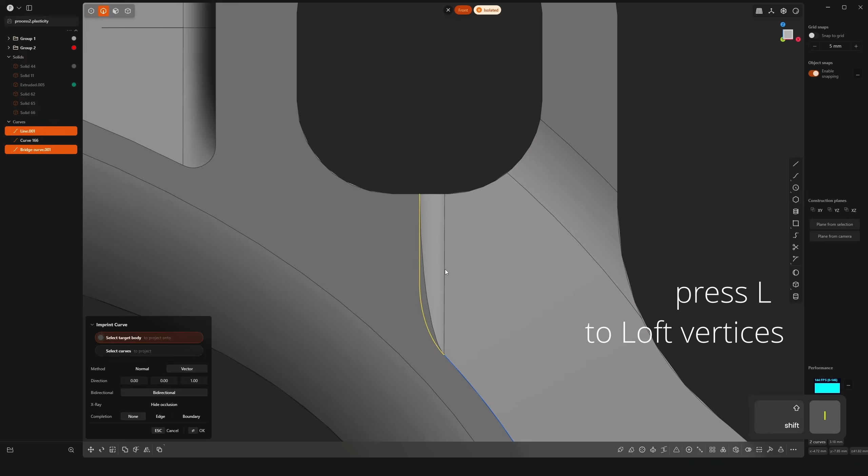Let's do the same thing on the right. Same logic, G1 where we want it to be smooth. Delete redundant topology command to clean the thing after our imprints.

I guess we are done. We'll see you in the next one.